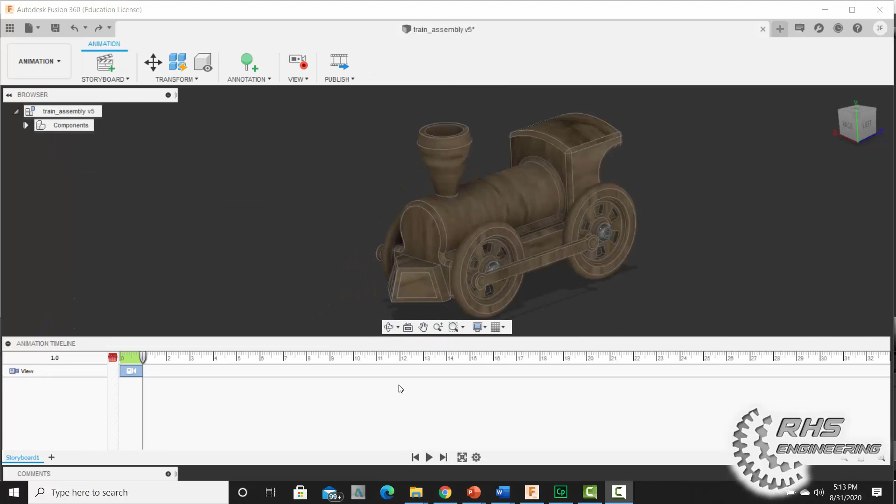Now I'm going to move this guy out of the way a little bit, get a good isometric 3D view where I can see most of the parts, and zoom out just a little bit.

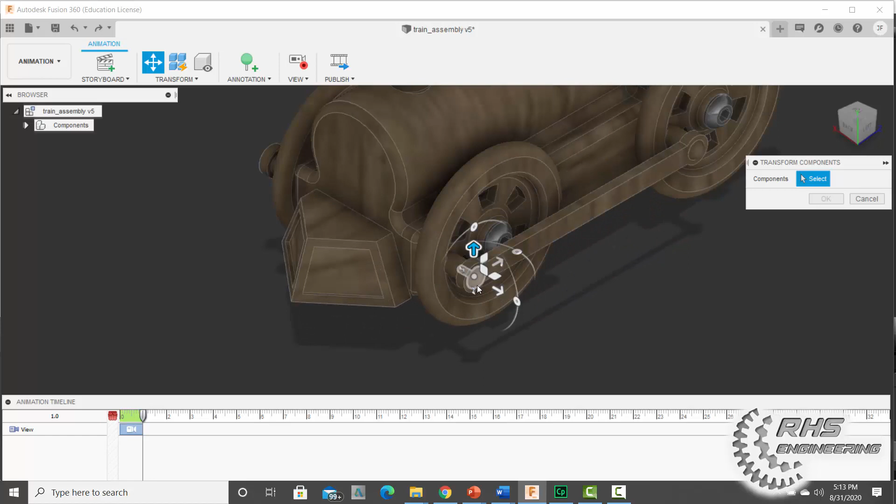What I want to do now is come over to transform components and start clicking on all the parts we made earlier and pulling them out. I'm going to zoom in, click on that guy, and pull it out. Distance of let's go with 3.5, enter.

Let's do the same thing with that guy. Click on transform, pull them out. Let's go with, once again, 3.5, enter.

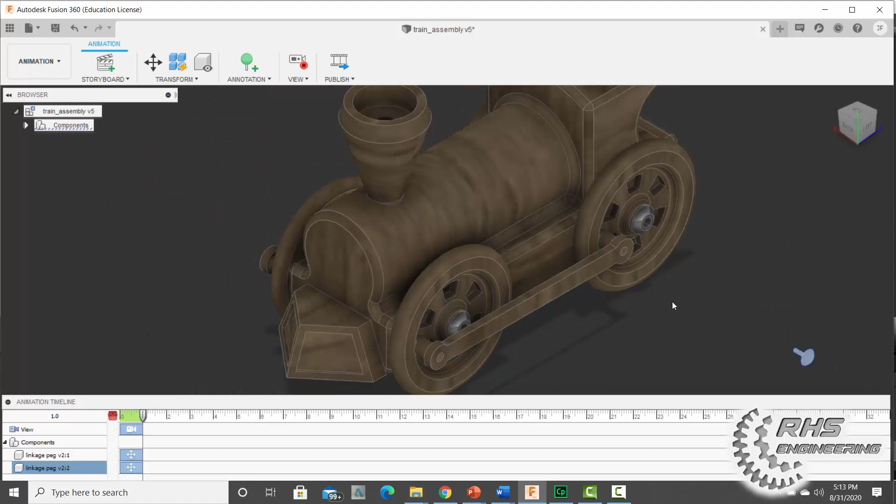Now let's go ahead and grab this guy, and we're going to pull it out. Let's go with a distance of, oh I don't know, -3.

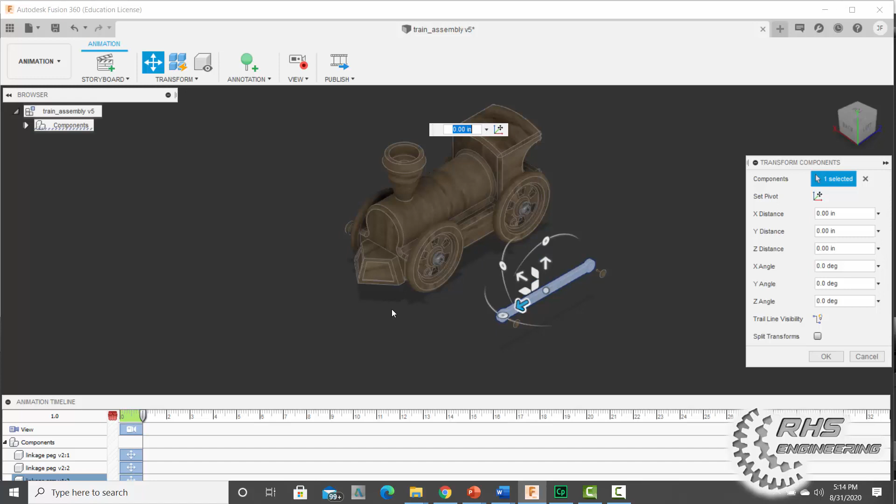Now we're going to grab our axles out. Click on that guy, pull it out. A distance of let's just go with 2. Same thing for the other one. 2, enter. Now let's do our wheels.

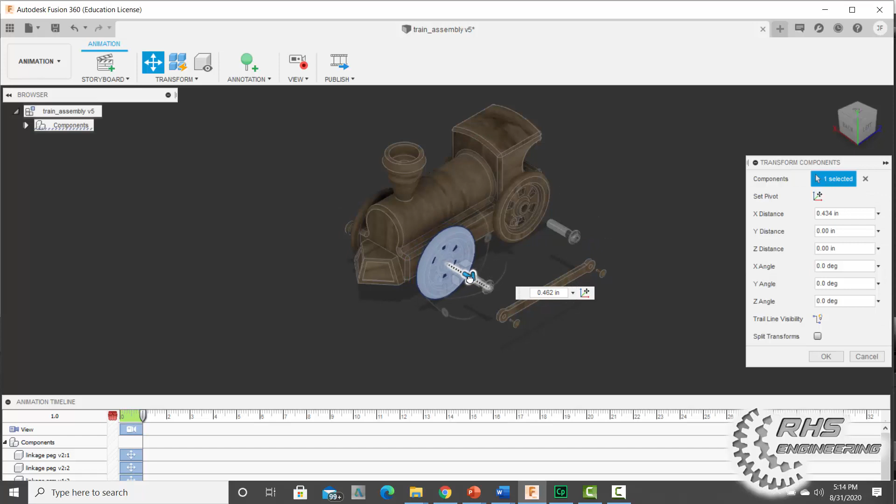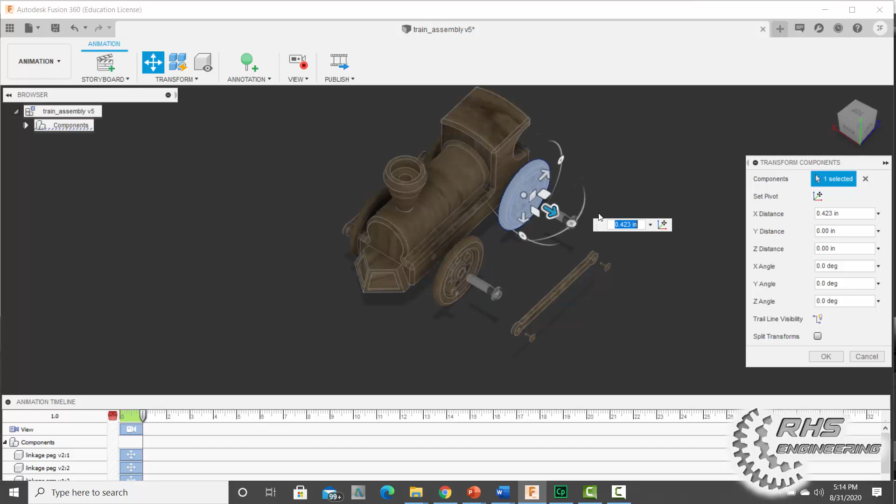Let's just go with a distance of, well, let's see here. I don't want to run into the axle. So that's probably pretty good. Let's go with 0.75, enter. Let's do the same thing for the other wheel. 0.75, enter. Okay.

All right, so now let's go ahead and do our cow catcher and just pull that guy out. Let's go with a distance of 1 inch.

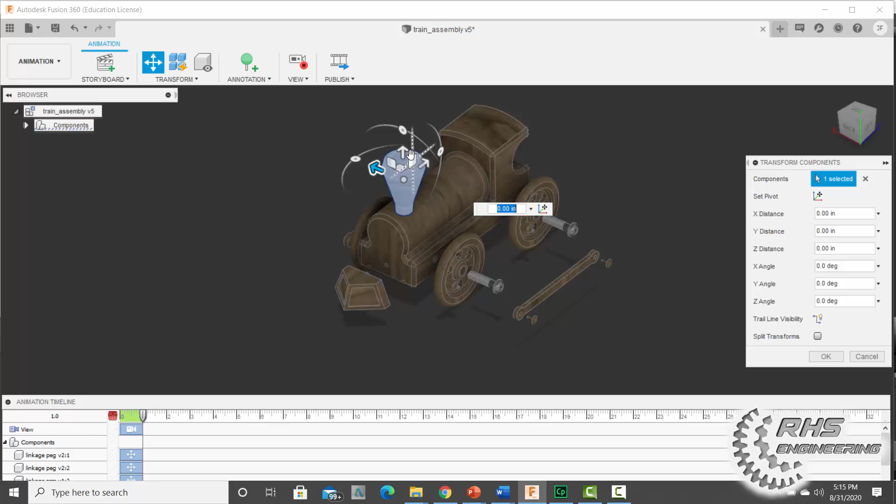Now let's take our stack out, transform, pull it up. Let's go with a distance of 1 again.

And now I'm going to rotate it around, and everything I did on this side, I'm going to do now on the other side. There we go. I'm trying to remember how far I pulled those out.

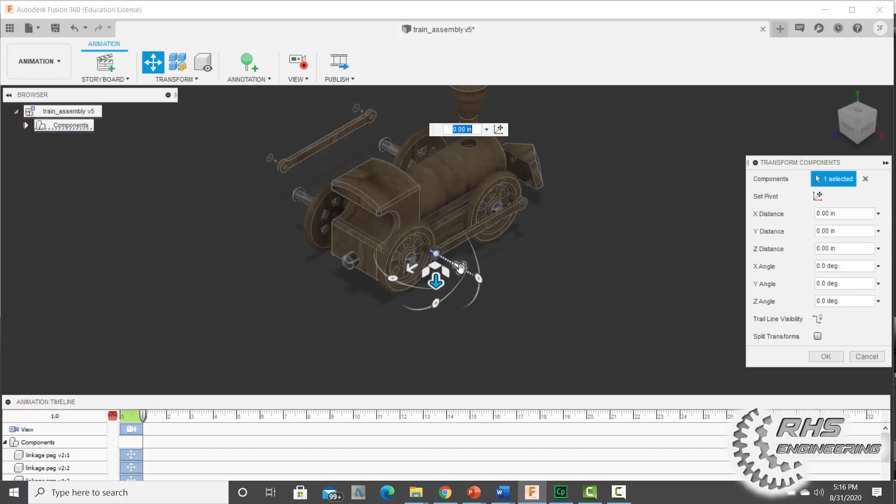Let's see here, I think it was 3.5. So let's go with 3.5, and hit cancel because I meant to pull it out the other way. This way, 3.5, enter.

And let's do this one. Oops, cancel, gosh darn it. That's what I get for not zooming in here. 3.5, enter.

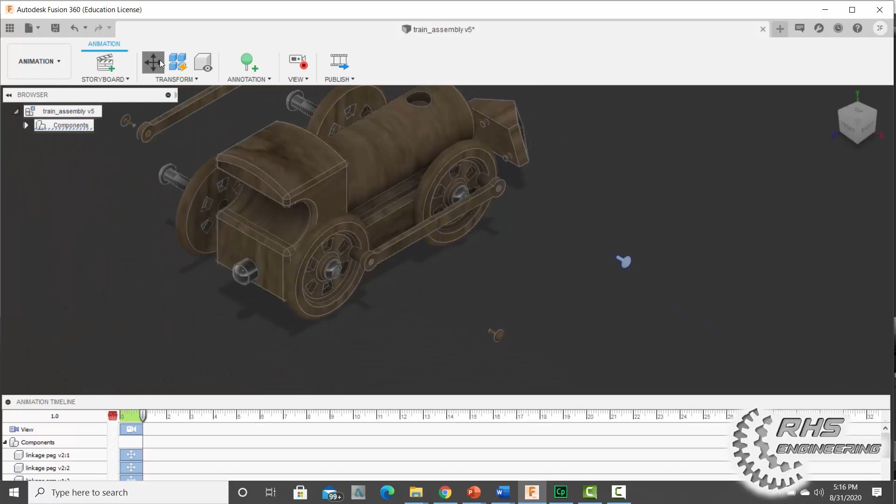See the linkage arm, pull that guy out. I think I did a distance of 3 or -3.

Enter. And now let's get our axle pegs again. Let's pull them out. I think I did a distance of 2.5.

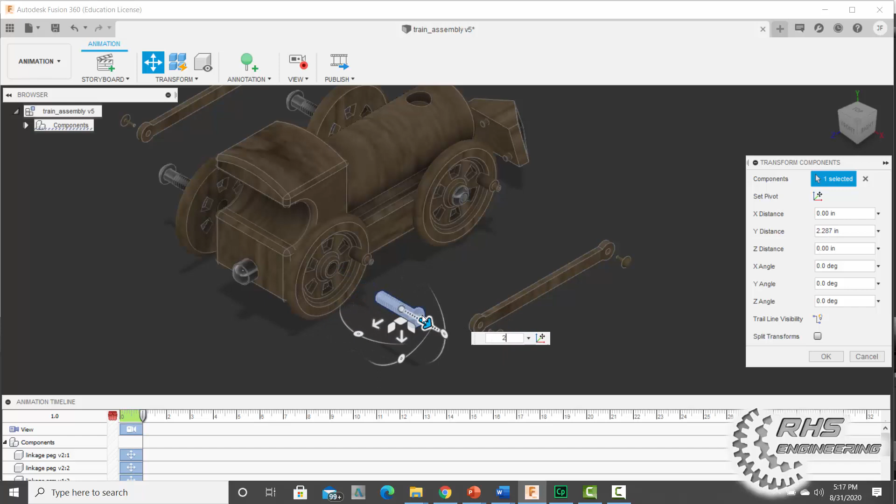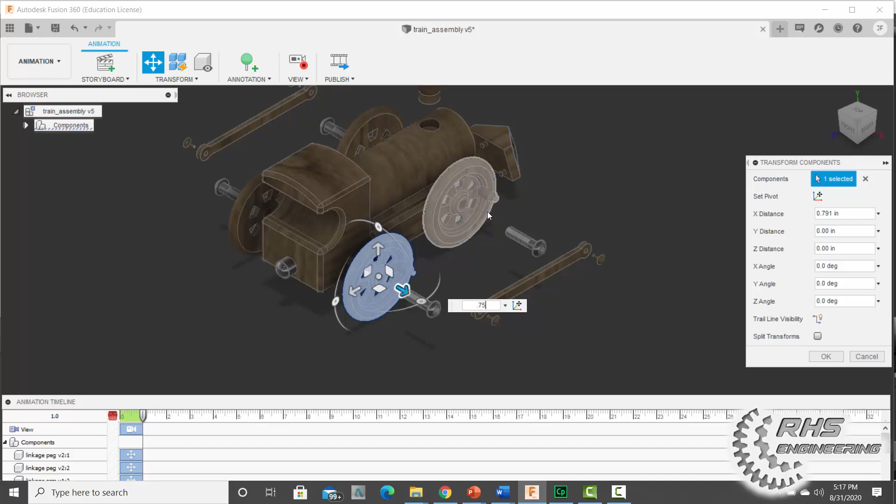Okay, and now our wheels. I think I did those 0.75. Okay, and fool around, you can make them whatever distances you want. The goal is to make it look nice and symmetrical so that everything looks organized and different parts aren't all scattered in different locations, okay?

All right, now we're going to go ahead and pull out our magnet peg here. Let's just go with, oh I don't know, 1.5 should probably work. And then for our magnet, let's pull it out about 1.

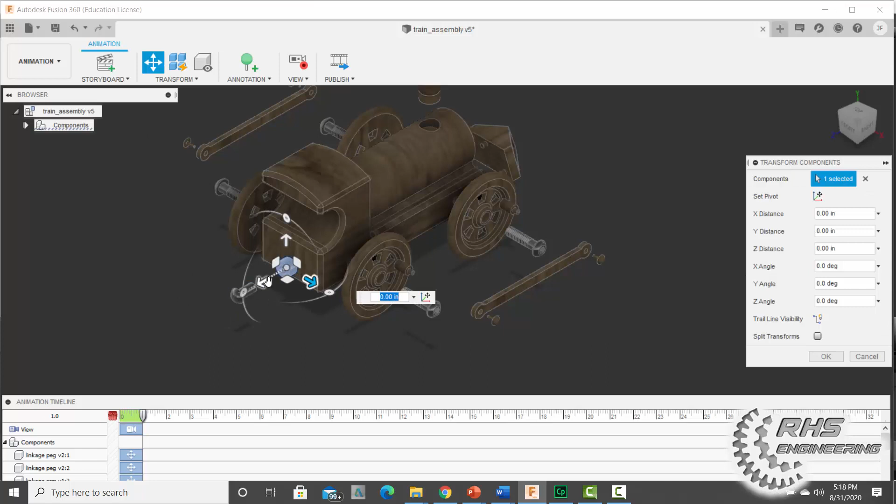Nope, not that far. So let's come on over here and adjust those guys. Actually, let's just do an edit undo and try it again. Let's just go with 0.75. All right, that looks pretty good.

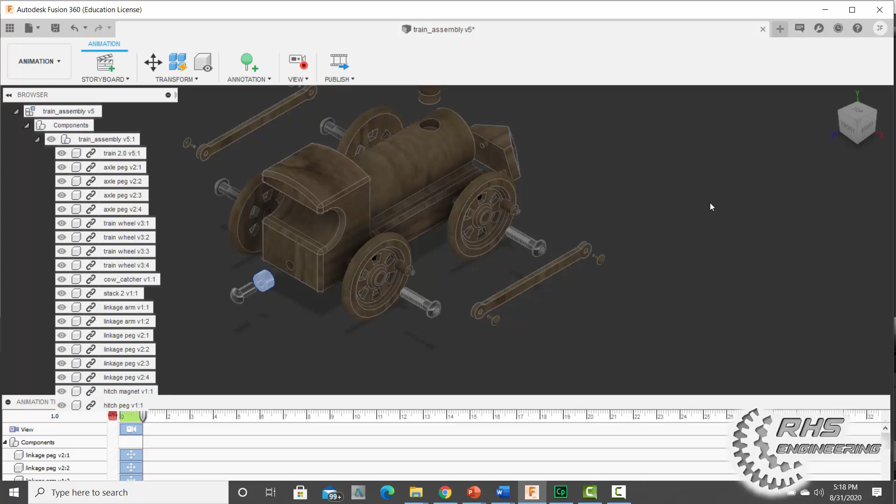All right, I'm going to go ahead and close or minimize these here. Now I want to check, I'm going to kind of rotate around and make sure everything looks symmetrical. And I can tell you right now, I'm not very happy with it because these are closer to the wheels than these are, so I'm going to adjust those.

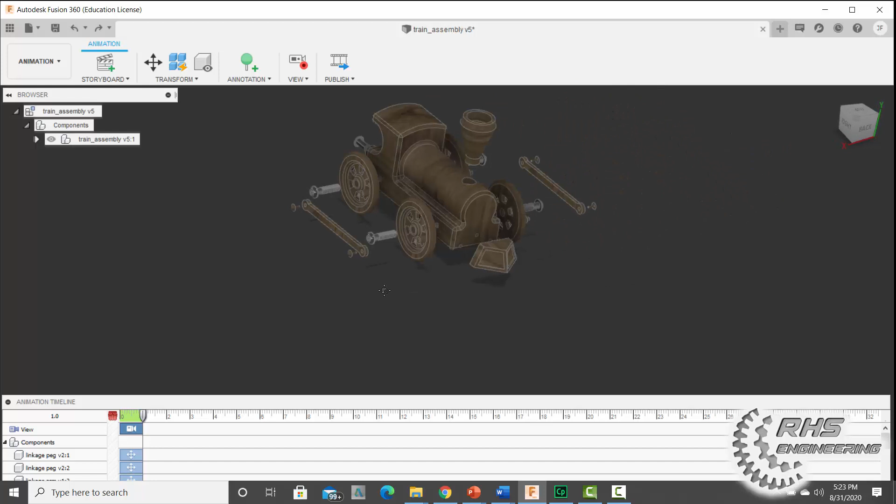I'm going to go back, okay, and kind of right click on them. Now I'm going to go back to transform components and just pull them out as best I can so that they look right. 0.376, hit OK. Let's click on that guy, transform.

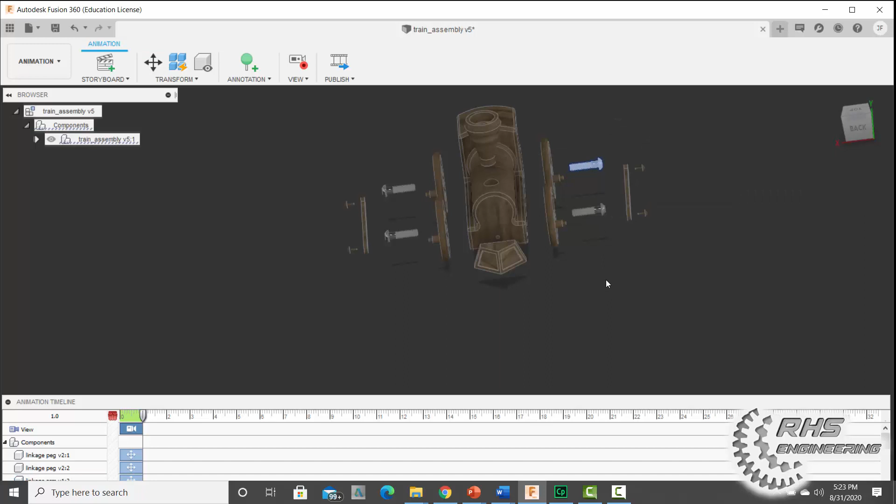0.376 so it's equal with the other one. Let's see here, let's see how that looks. Yeah, that looks pretty good, pretty symmetrical. Everything looks nice and even.

All right, so I like what I see. Let's go ahead and save it now.

Now I'm going to move our little movie here up a little bit. Notice you can move these around, you can shrink them, you can do a lot of different things, so you can customize it to make it look as cool as you want. So I'm going to go ahead and hit play. Notice it kind of just spreads everything out, okay?

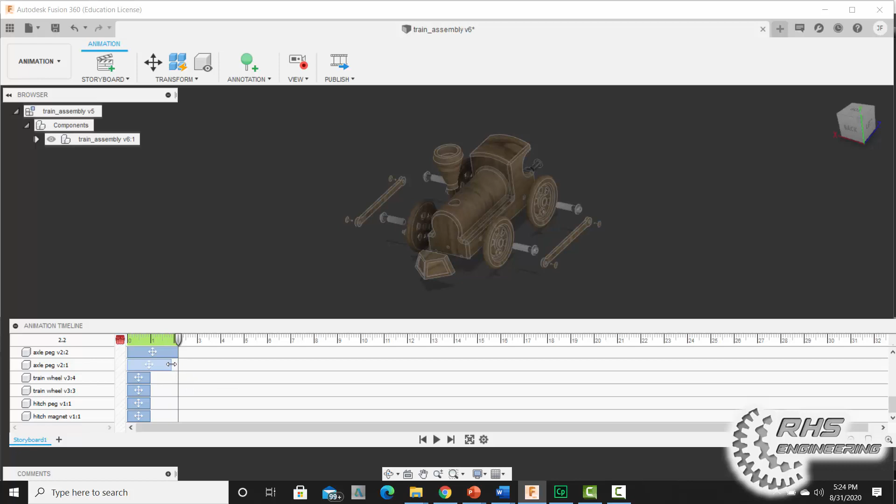But there's a lot of things we have here that we could mess around with, and we can make them all sort of exaggerate it so they're longer, or we could stagger them so that we do one part at a time. There's a lot of different things. I'll let you guys play around with it.

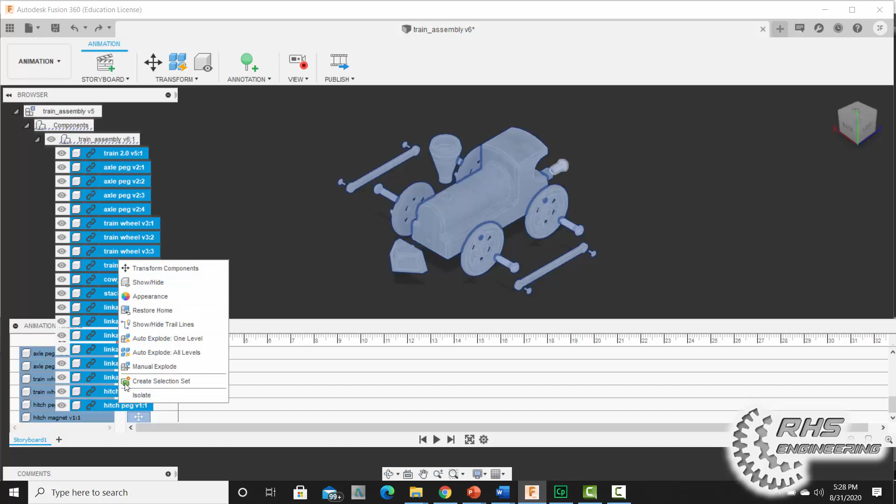All right, and the one thing I like to do is show trail lines. So I'm going to come on down over here and click on this guy, hold down Control, and I'm just going to click on all my parts as I hold down the Control key. I'm going to right click, show trail lines, okay? And then I'm going to minimize that.

All right, and that should do it for this animation. Go ahead and, like I said, save it.